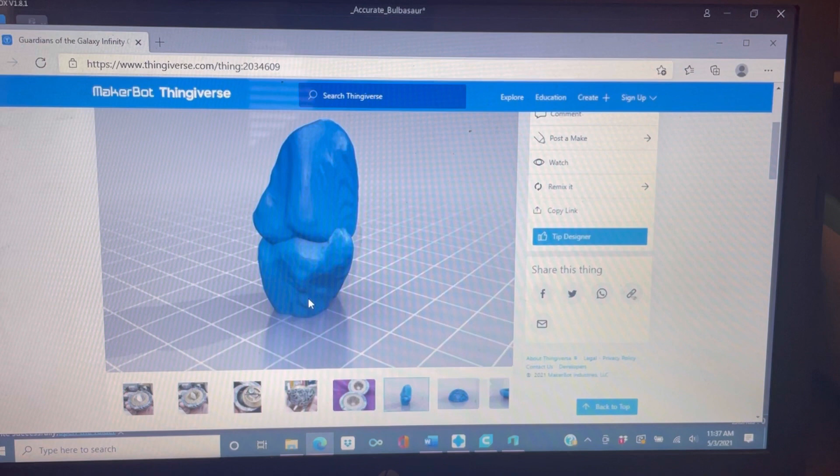There are numerous files out there you can get, probably about 4 or 5 different makes. The reason I chose this one is because it already had the crystal that you can print. Some of the other ones did not have this piece, and I was like, how am I going to replicate that? Then I found this one—cool, it's already there, easy peasy.

Going over the files, you have 6 files, although one of them's repeated, so it's really only 5. Basically you've got the crystal, this orb outer rim piece, the interior piece, another orb rim which you don't need, and the orb exterior. So I actually lied—there's really only 4 pieces, because the outer piece here you just print twice. It's literally the same exact piece, so there's nothing different about it. You just print it twice.

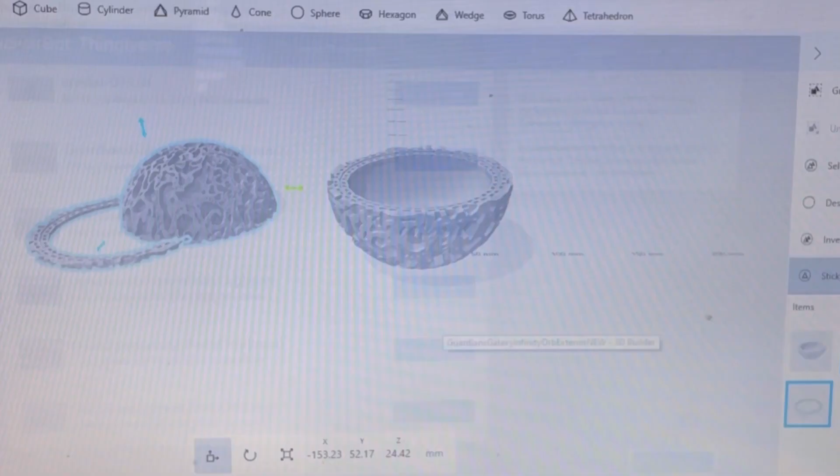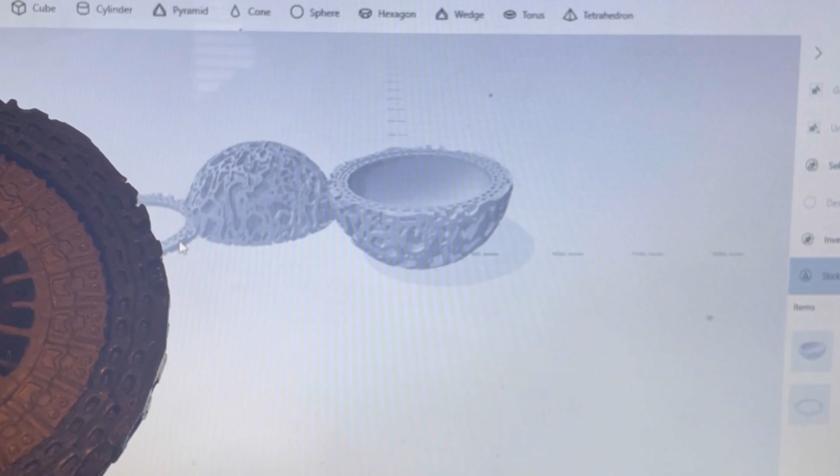Same thing with the interior piece—you just print that twice, and they both fit in there nice and easy. The way this piece is set up, and this is just a recommendation: the orb itself, the outside of the orb, is actually 2 pieces. The reason is because this interior piece, if you put it on without this outer rim, it'll just kind of slide out. This opening here is actually larger so it can slide in, and then they want you to take this piece and put it on there to keep it in place. That's all fine and dandy, however, to try to put body filler on all this would be nearly impossible, and you'd have a very harsh line that would be really hard to sand.

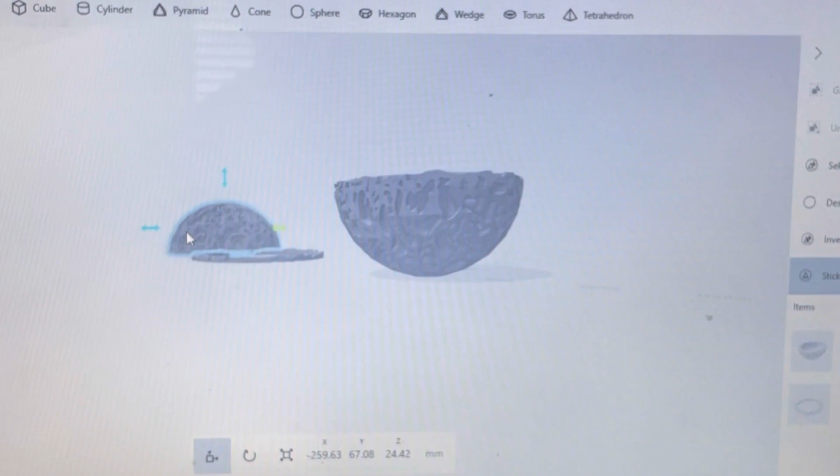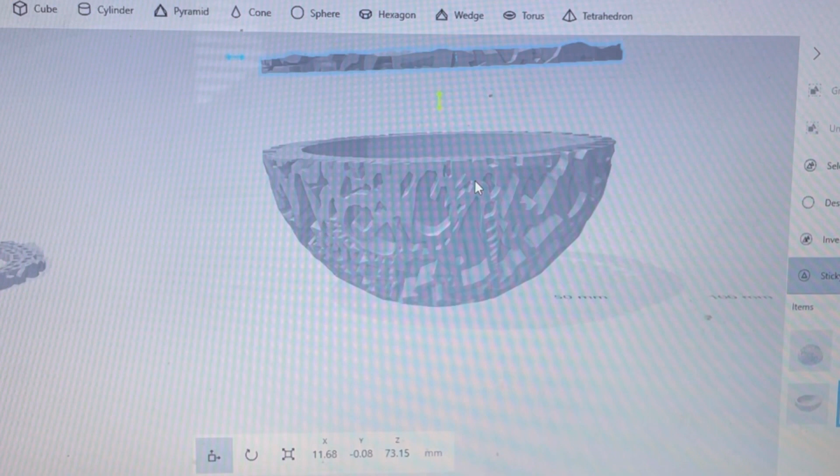So what I recommend, and what I did, is take these 2 pieces and combine them into one. You just get it lined up—I'll ungroup this so you can see. Here are both pieces. You basically just get this top piece lined up and lower it down until it clicks in place. Boom. Then you just group them together—select both of these, group them together. Boom, it's one piece, there's no seam. You don't have to worry about messing with body filler or anything like that.

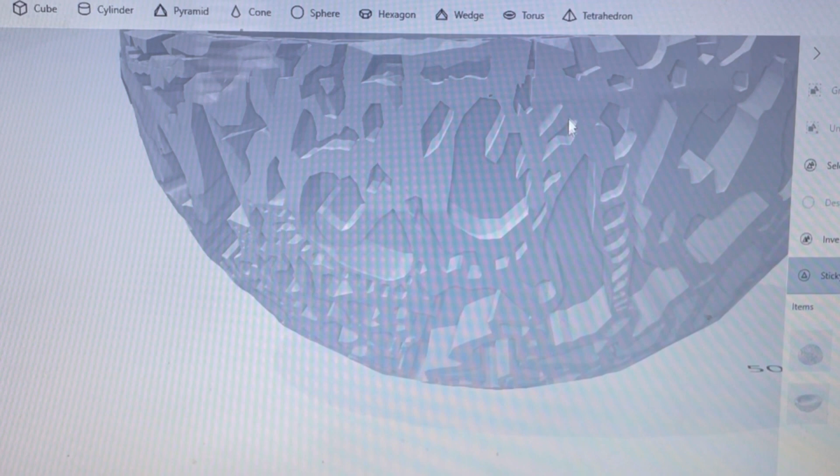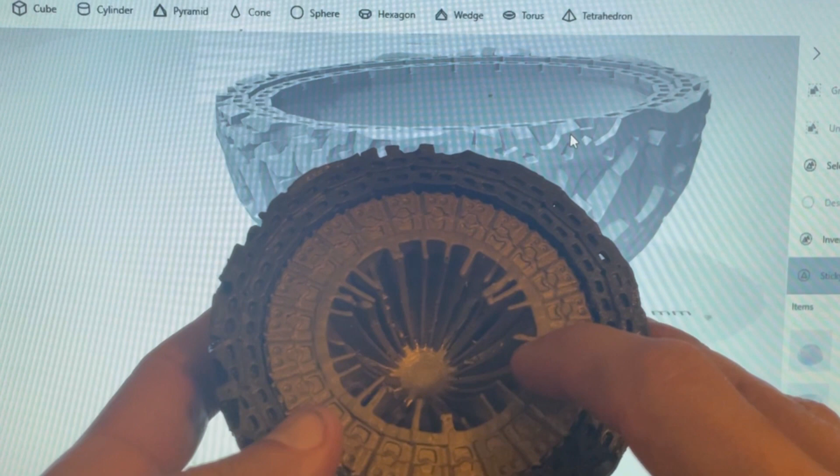You're good to go. Now what you'll have to do with this piece here is just scale it to 99%, and then put some glue in it. It'll hold in place perfectly fine. I used super glue, but you can do hot glue if you want. I just did super glue that way—it wasn't too bad, so I just loaded it up and did that. This was merged as one piece, because if you try to sand it, even with body filler on there, it would be very hard to get totally smooth. So basically I merged these pieces together so it was one solid piece, scaled it to 99%. I did sand a little on the outside, but it slid right in and was perfect. I recommend doing that for the file versus trying to do those 2 pieces.

It's just going to be a hassle trying to sand and smooth out that body filler, so I definitely recommend to do that.

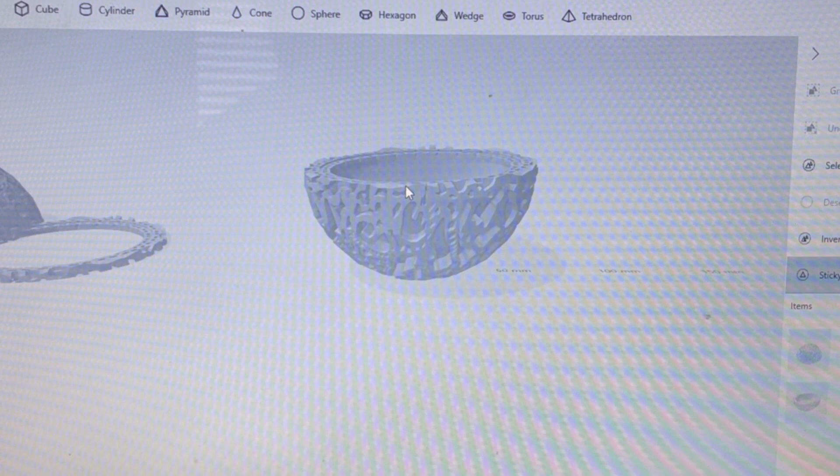I used Windows 3D Builder, a very easy, free program. I've got a couple videos on it covering how to split and merge parts if you need more information, but it's very easy. Just open both parts, get them lined up, drop it in, group them together, and you're good to go. Once you have all that set up, you can print your pieces.

So I'm going to kind of readjust the camera and just let you know how everything printed.

When it came time to print the orb, it was pretty straightforward, nothing too crazy. I had them facing down, and it printed some supports on the inside. I did a 0.2 layer height. I was going to go with something a little bit higher, but I really wanted to get this done in a day or two. Luckily I was, and overall it came out really good.

Maybe going to a 0.12 would be better, just a little bit, but I feel like the process I did gives it a pretty good look. It is an orb, it's not meant to be perfect. I'll probably revisit this project and change a couple things as far as paint schemes and the way I process it, but overall this was a really good way. I'll give you some tips on what I could have done to make it look a little bit better.